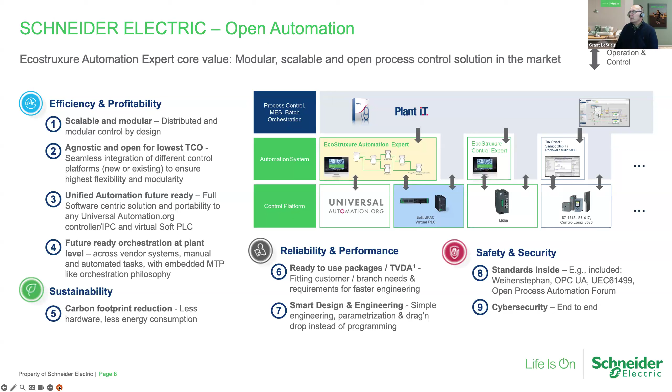And in doing so, that means that we can leverage proven in use, and we can finally stop reinventing the wheel by having to always create control system strategies or control solutions as if this is the very first time. So you could imagine then that using this concept, you could have a standard function block for 3-element boiler control. You shouldn't have to reinvent that control strategy every time. You shouldn't have to reinvent control strategies for heat exchangers or more complex process units. So this really just serves as a reminder of what some of the core value principles are of Automation Expert and 61499.

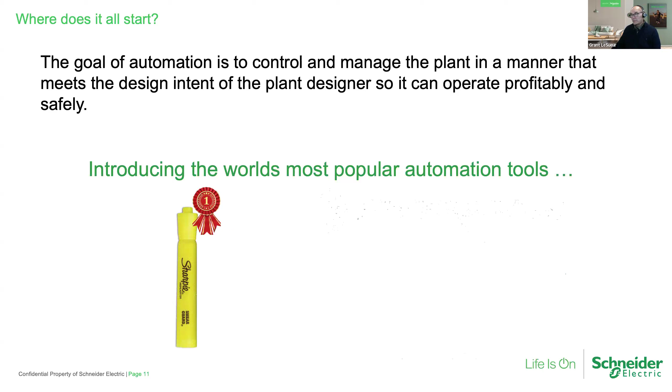And I just wanted to show you what I believe are the world's most popular automation tools in this context. Number one is a good highlighter pen. And number two is a good spreadsheet. Of course, back in the day, we might have used dBase 3, if you're my age, to capture some of

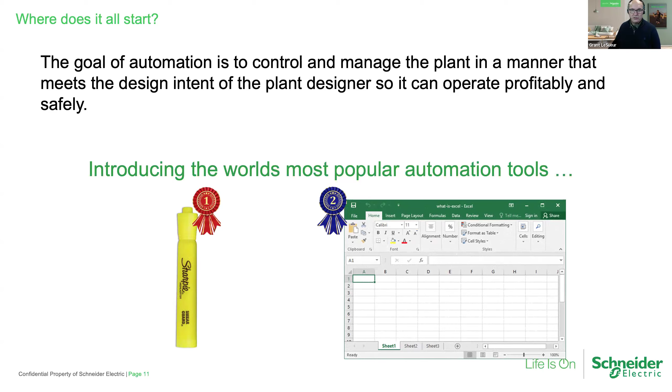these details. But what we invariably do with these two tools is we use the highlighter pen to go through piping and instrument diagrams, reconcile them with instrument data sheets, and, if we're lucky, we might get a control narrative or a URS. And we put all of that information together, and then we start to program the control system of choice and create the operator interface in the control system of choice.

Now, if the data sheets are any good, they would tell us what the calibrated ranges are of sensors, the kind of actuators you have. Is it air to open or air to close, spring to open, spring to close, fail safe, fail to open, fail to close, those kinds of information, and alarm set points. We can generally see alarms on piping and instrument diagrams, but we don't get to see alarm settings that normally have a context of engineering units. So we spend a lot of time processing all of this information.

And then as control system engineers, what do we have to do? We have to come up with a hardware architecture. We have to allocate signals to I/O, make sure that the I/O is suitably distributed so we can pick up all of the signals in the field. We need to understand then the control intent. What does the control system have to do, and how should the operator interact with the plant? So then we set about programming the control system and the HMI and testing and commissioning. This, by and large, is the end-to-end workflow.

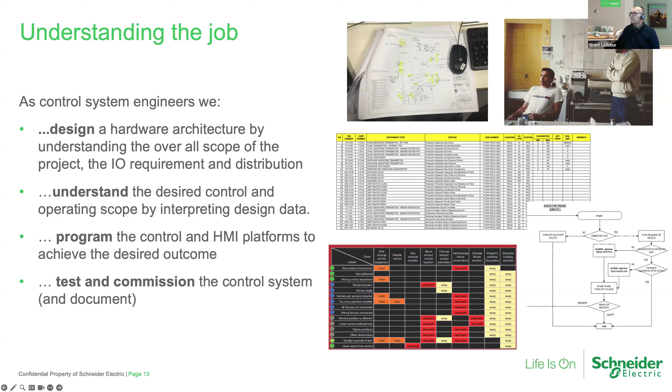As a matter of interest, that's what I looked like 30 years ago working in Germany.

So a little bit about Asset Link. So the whole idea here now is that we can take an object and we create, and I'm not sure if I really am a big fan of this term, a digital twin of the asset that we're controlling. So let's say it is a power plant. Then a power plant might be made up of water treatment, demin water, fuel handling, combustion, steam generation, electrical generation, and so on. So we would model those process units as physical assets. And then within our tools, at least, you would define the runtime controls and the HMI for those items.

And then as you instantiate those assets, you will be programming the control system by instantiation. And that's, in fact, how 61499 and EcoStruxure Automation Expert works. It's an object model where you can consolidate all of these facets of automation into a single object representing this physical asset, and then you can deploy that asset as many times as you want. If you have 3 boilers that are identical, just instantiate your library for the boiler 3 times and you're done.

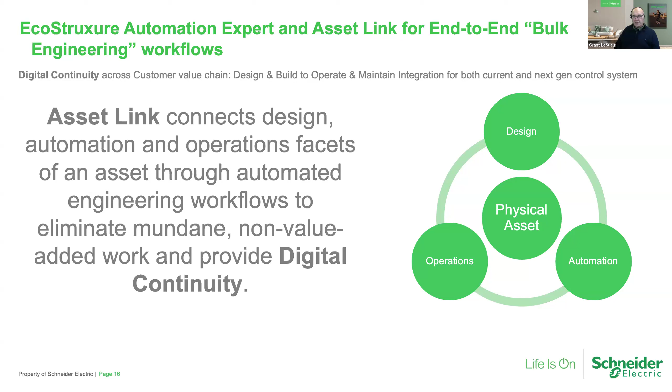But as I said, there's a lot of engineering data that has to cross from design intentions into our tool chain. And as I mentioned earlier, we have design tools for doing that, particularly from AVEVA. But in its simplest terms, even if you don't have all of this stuff in the top layer, you might just have a reliable set of Excel spreadsheets. So our tool chain will consume that data. You can then assign some kind of template to every instance, and then from there, bulk generate the control system.

So the idea here is if we're using the same library templates over and over again, we can be assured that we're going to get a known outcome. And if you have used these libraries before, then you can take some confidence through proven in use that a level control loop works just fine. You've used it 100 times, and you've tested the heck out of these loops before. So you can start to relax what your test criteria look like. So that's essentially what we're trying to do here, is to use a rules-based approach to bulk instantiate.

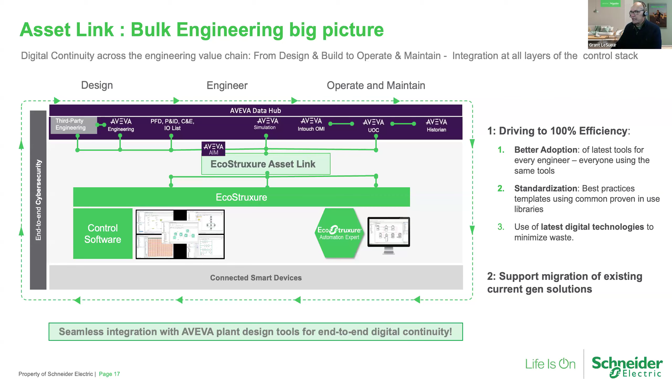So taking that fancier diagram and saying it more succinctly, we can take the instrument spreadsheet as an IO list, pull that into our tool chain, and using that tool chain, we will assign some kind of function block template. And then from there, we can instantiate the templates for the controller. And as we instantiate those templates, it will also generate the HMI. And the HMI will be linked. We don't even have to know what the intermediate signals are between the HMI and the controller, because those were defined in our templates. So just a very simple three-step process.

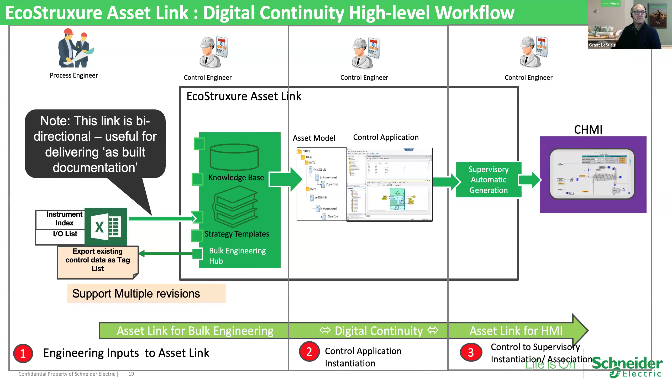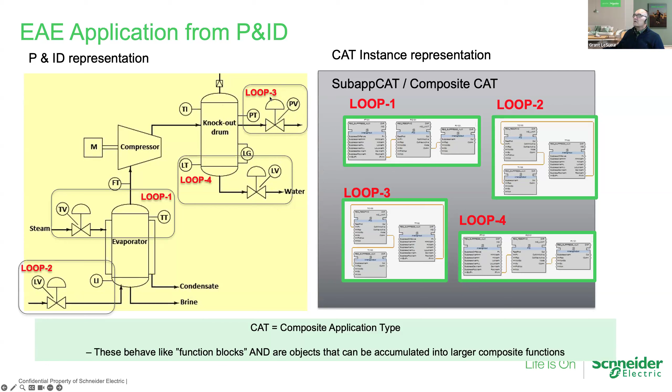So I can put a little rule in my engine that says, hey, look for everything with an L in it, and then use the appropriate level control loop template. Look for everything that might have a P in it, then use the pressure control valve typical or function block template for that loop. So when we create rules, it'll automatically assign the right template based on your rules for doing the instantiation.

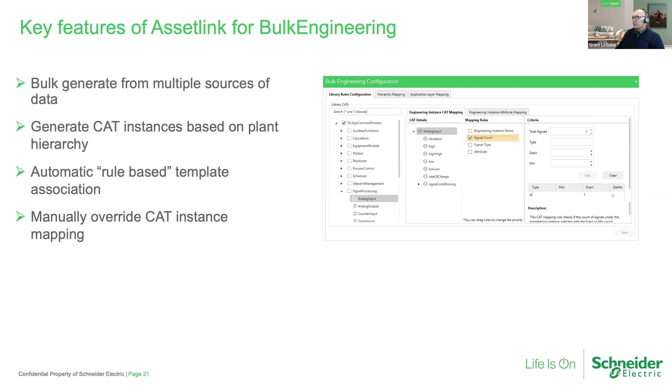And here we can see a little bit about how we configure what we're looking for to trigger those rules. Is there a certain combination of I/O signals? Do we have certain values in certain fields? It's very expressive, but once you've defined the rules, it very much becomes a plug and play, load and go kind of situation.

So here's a little demo that I've created that walks us through this process. So here's a spreadsheet. Here we can see the plant name is wastewater treatment plant. It's desalination, and we're working in the chiller. Here we can see a number of instruments: flow switch, flow transmitter, HV, some limit switches here, and we've got different types of signals and engineering ranges.

I can see that row 10, for example, is a flow indicator. It is 0 to 150 kilograms per hour, and the loop number is F02. So my rule will probably see that that's a flow loop and apply the right template. So let's just see this play out a little more.

So here we are in our engineering tool. We're going to just make sure that we've got the plant model that we want to use. I can change this model if I want. This is using an S88 kind of convention: plant name, area name, unit name. That's kind of essential to set up the number of levels in our hierarchy.

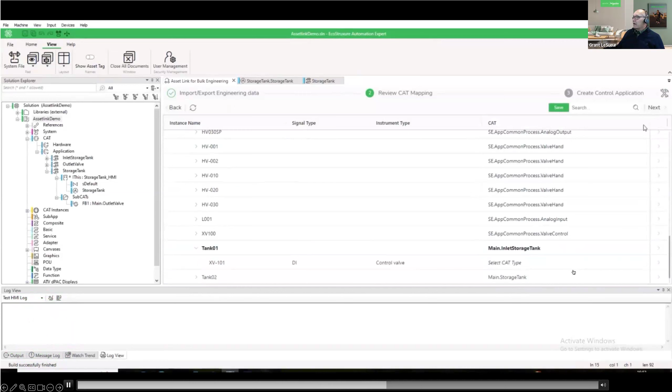And then you can see here that the templates have been assigned to each of those instruments using the rules that we defined. So here's a digital input for a flow switch, for example. As we scroll down, we can see we've seen a tank. So now we have a CAT that is for a tank. But if I don't like a tank function block, I can always override what the rules said it should be. And in this case, I've got a variant of a standard tank, and I've changed it to an inlet storage tank.

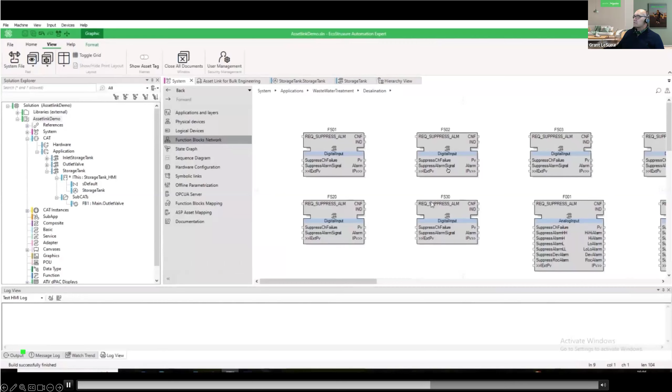So step 3, here we are, just about to hit generate. And once we generate, all of those function blocks or instances have been generated. Flow switch 01, they have had all of their attributes programmed based on data coming in from that spreadsheet, including the ranges, the alarm limits, and so forth, the signal types that it's required.

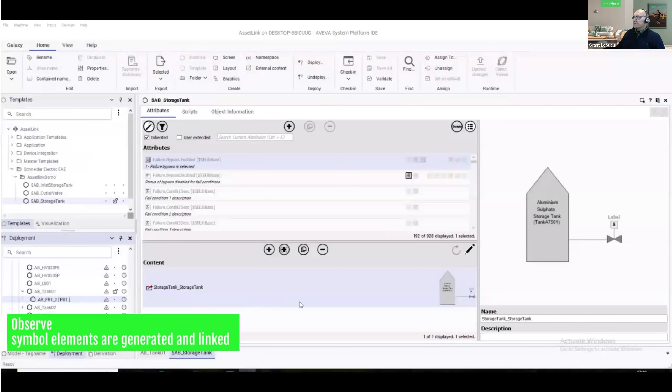And then the next step is if we hit another button, in our case, we can sync up to AVEVA System Platform and generate the HMI linked to the controller because we defined the HMI symbol, all of the signals as part of the template, and now I have generated my HMI as well.

And we know that the connection between those two things has happened automatically, and we've defined it, we've tested it 101 times as well, so proven in use, and I think we've managed to save ourselves a lot of time in the engineering workflow. So that's basically the process of what we're doing.

Oop, I've dropped out of presentation mode here.

I did promise that I would just mention a little bit about how we see AI playing into this game. I'd mentioned at the very beginning that one of the things that we do is we go through paper P&ID diagrams. We use a highlighter pen to do material takeoffs.

We have in fact created an AI that can scan and digitize P&IDs, even if they're cruddy old paper ones, and it'll do some symbol recognition on the symbols, and it'll extract the loop numbers, and we will create from scratch, from cruddy old drawings, this DEXPI file that I mentioned. So within our tool chain, we have this ability using some kind of machine learning to do that.

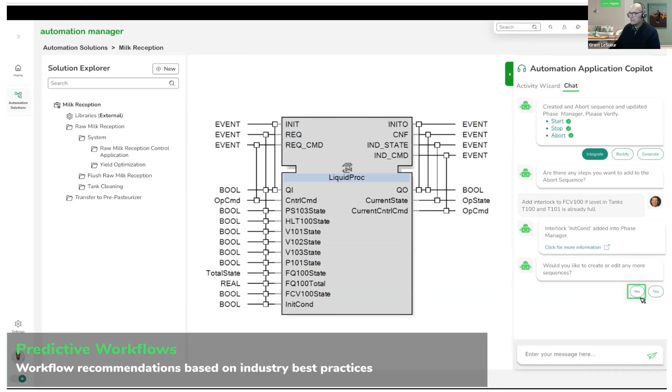So the benefits of eventually using an embedded GPT is, as I've mentioned, being able to bring people from newbies up to experts very quickly, to be able to access best practice knowledge and workflow, to assist with workflows and so forth, and just help continue to drive engineering efficiency.

So just coming up to the end here now. So key summary, IEC 61499 Automation Expert enables us to create a control solution that's hardware agnostic. And the benefit of that is I could use anybody's hardware. And if the hardware goes out of date, I can move my control logic from the older controller to a newer one without having to revalidate the control logic. This is a big one, particularly finding a lot of favor in life science industries.

The engineering workflow, we're kind of expanding the access or utilization of data, trying to eliminate the need for a highlighter pen and spreadsheets and connect directly to those data feeds and use that data together with some best-in-class libraries to just generate controls and operator HMIs.